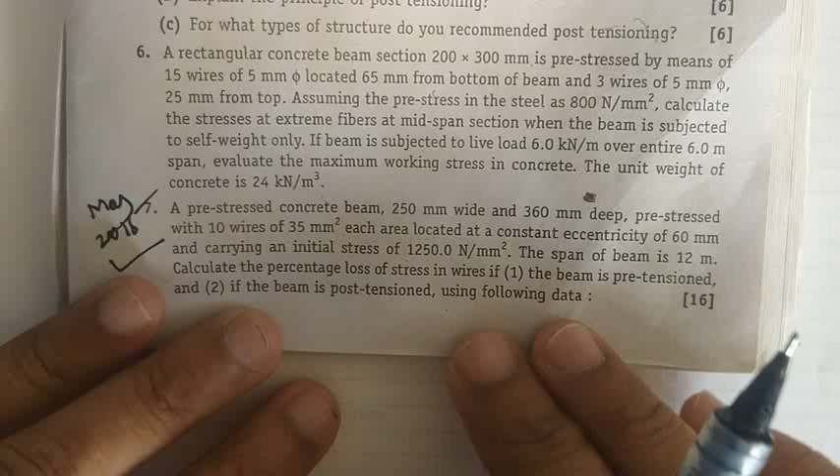Let us solve another question related to the calculation of losses. The question was asked at 2016 for 16 marks. Let us go through this question.

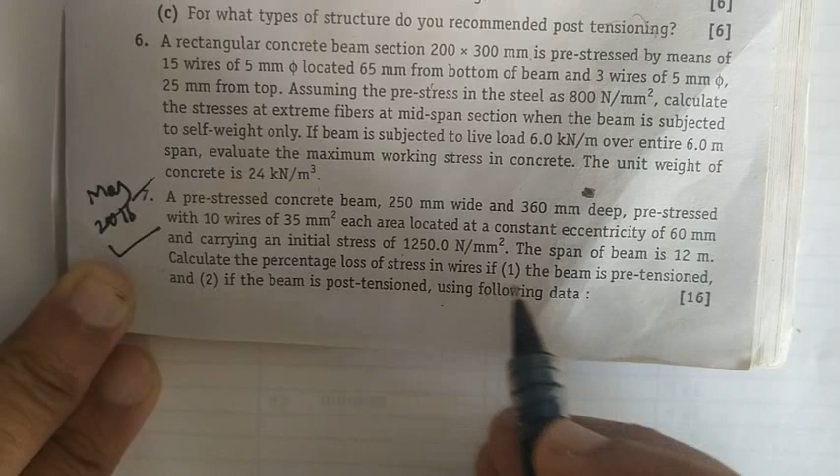A pre-stressed concrete beam 250 mm wide and 360 mm deep, pre-stressed with 10 wires of 35 mm square each, area located at a constant eccentricity of 60 mm and carrying an initial pre-stress of 1250 Newton per mm square. The span of beam is 12 meter. Calculate the percentage loss of stress in wires if the beam is pre-tensioned, and second one if the beam is post-tensioned, using following data.

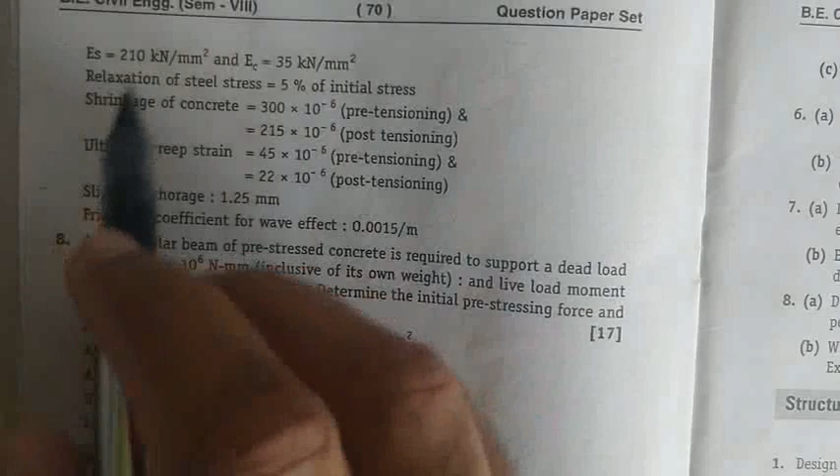The given data is: Young's modulus of steel is equal to 210 kilonewton per mm square. Young's modulus of concrete is equal to 35 kilonewton per mm square. Relaxation of steel is equal to 5% of initial stress. Shrinkage of concrete is equal to 300 into 10 raised to minus 6.

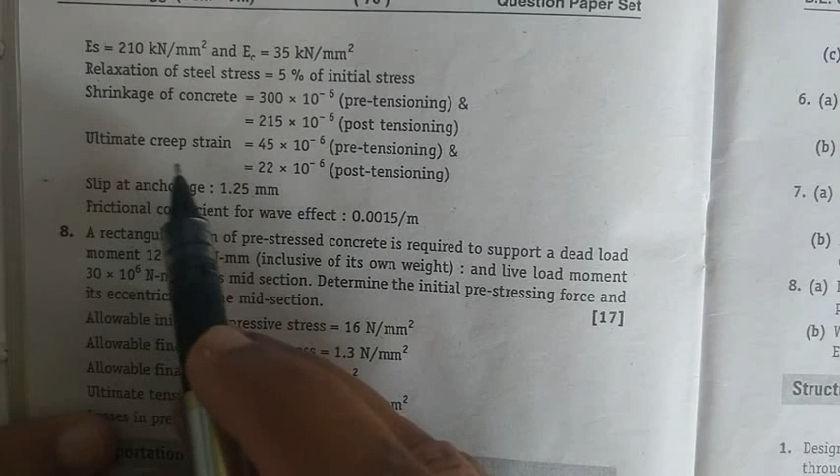This is for pre-tensioning. It is 215 into 10 raised to minus 6 for post-tensioning. Ultimate creep strain is equal to 45 into 10 raised to minus 6 for pre-tensioning, and 22 into 10 raised to minus 6 for post-tensioning. Slip at anchorage is equal to 1.25 mm. Frictional coefficient for wave effect is equal to 0.0015 per meter.

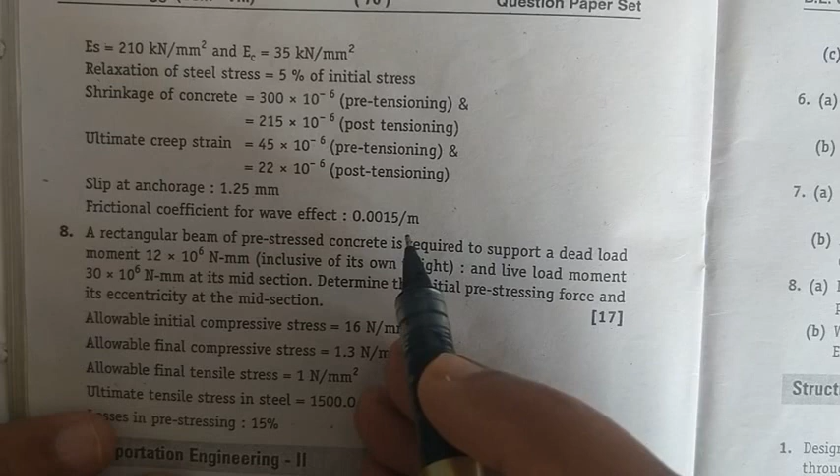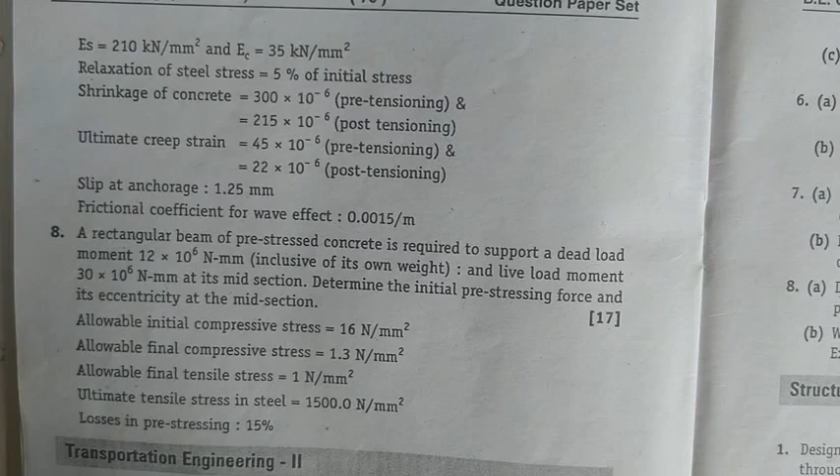You have to find out all these losses and make a list of all these losses related to the post-tensioning and pre-tensioning beams, and find out the percentage loss. Let us solve this question.

First you have to sketch the cross-sectional view of this beam. So this is the cross-section of the beam with 250 mm wide. The depth of beam is 360 mm.

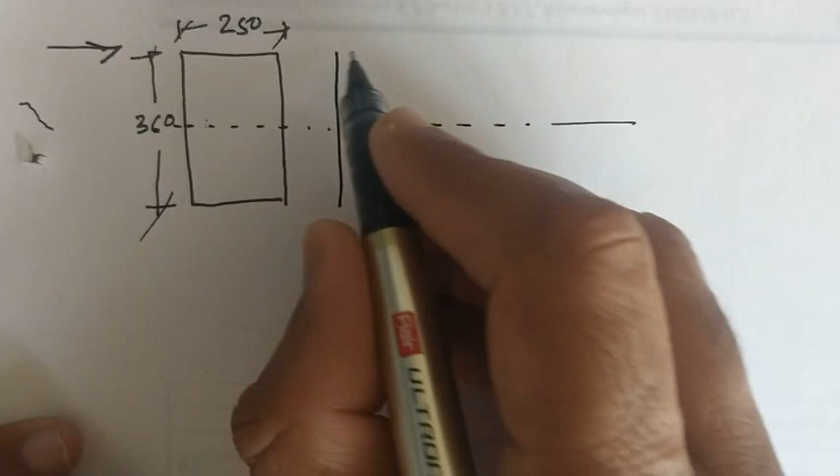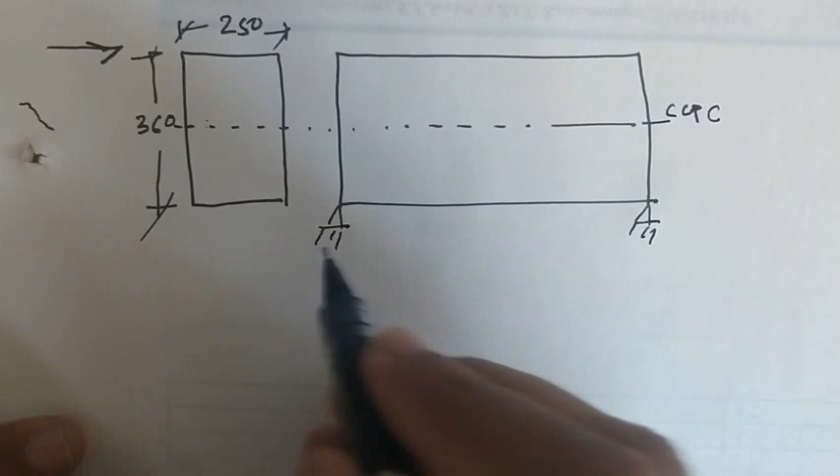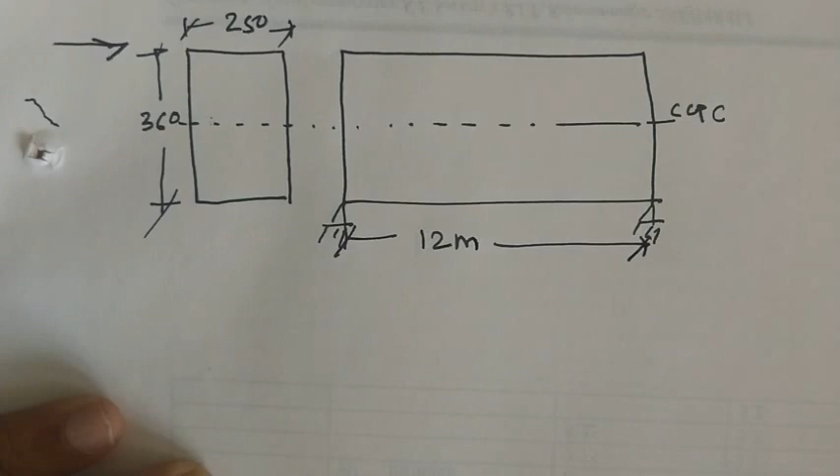This is the CG of concrete. Also you have to sketch the longitudinal section of the beam. Span of beam is 12 meter. The tendon is having constant eccentricity of 60 mm, meaning the tendon is straight, with a constant eccentricity of 60 mm.

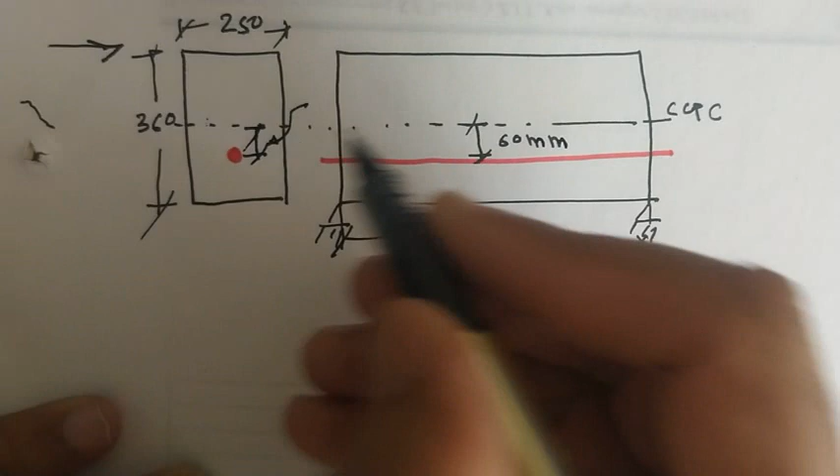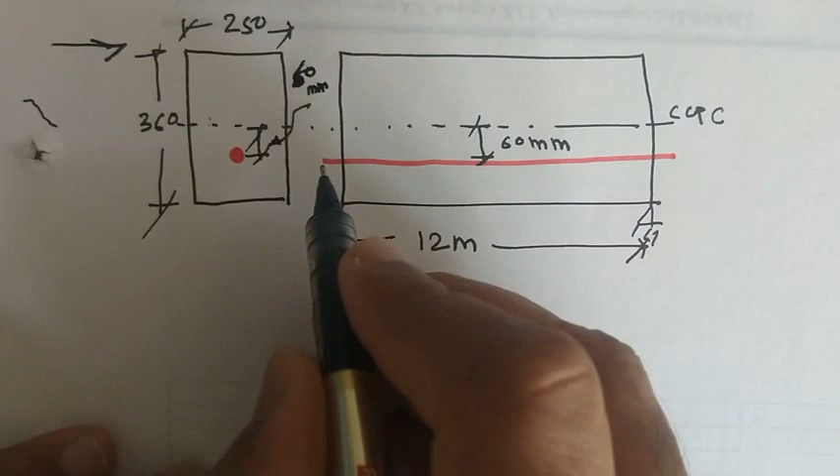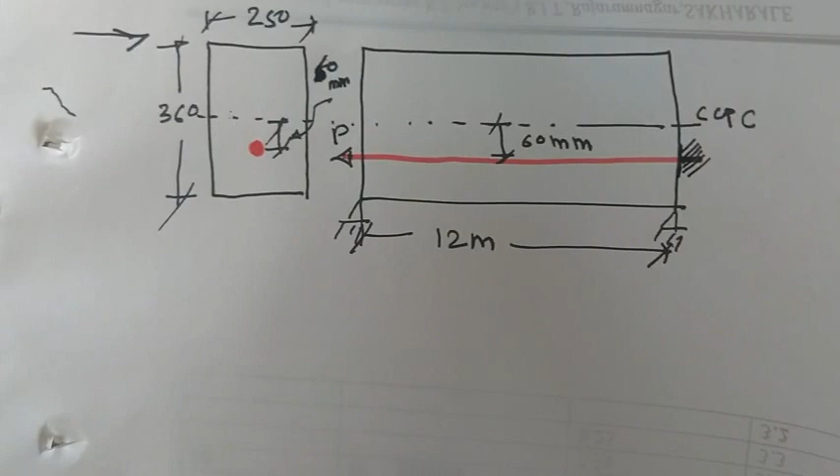You have to also show the wave of the tendon in cross section. The eccentricity is 60 mm. Pre-stressing force is provided here. Let us assume that one end is fixed. So you have to find out all the losses with respect to the given data.

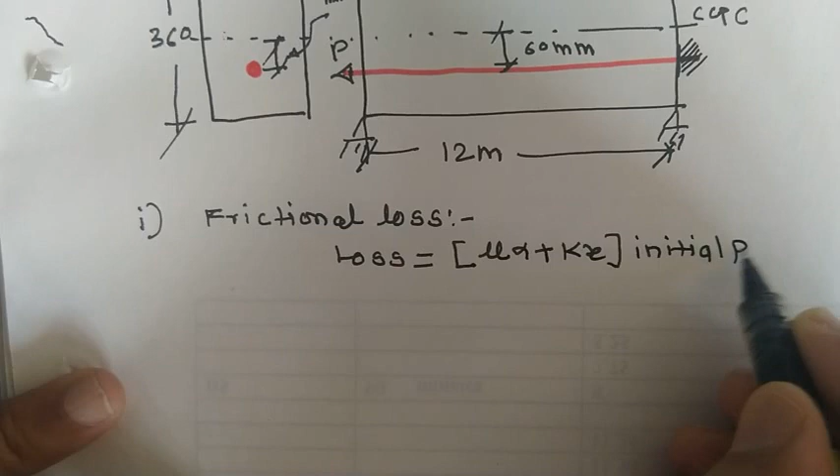So the first loss is the frictional loss. We know that the frictional loss is calculated using the formula mu alpha plus kx, into initial pre-stress. Again, the mu alpha term is 0 because it is a straight tendon. The value of K is given in the question: it is 0.0015 per meter.

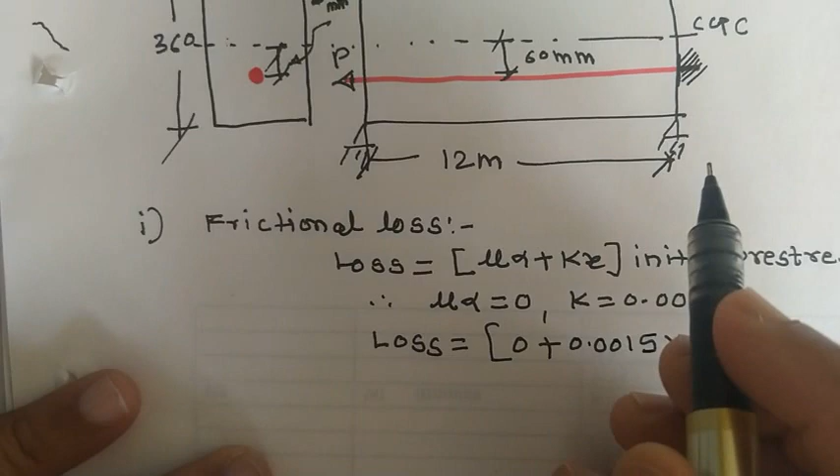So let us calculate the loss. This term is 0 plus 0.0015 multiplied by x. X is the distance from the jacking end where the maximum loss is developed. Consider this the jacking end and this the remote end. Always at the remote end the maximum loss is developed, so x is nothing but the span of the beam. So we directly put here 12 meter.

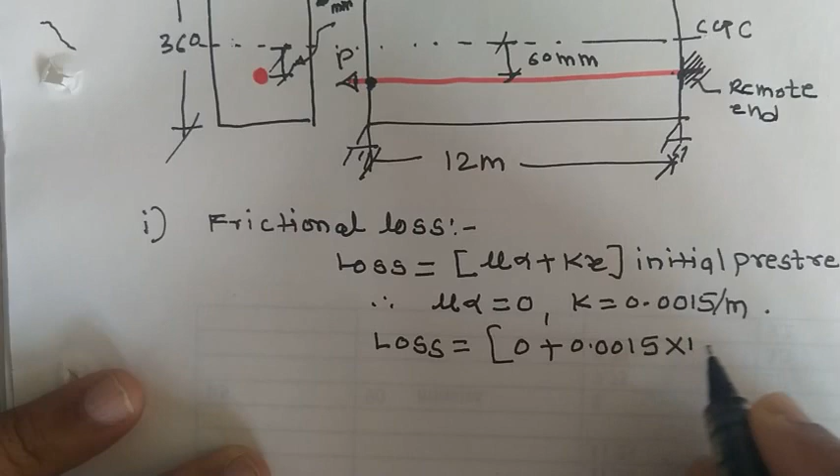And the initial pre-stress is mentioned in the question, it is 1250. So what is the frictional loss? Let us calculate the multiplication: 0.0015 multiplied by 12 multiplied by 1250. So this loss is 22.50 Newton per mm square.

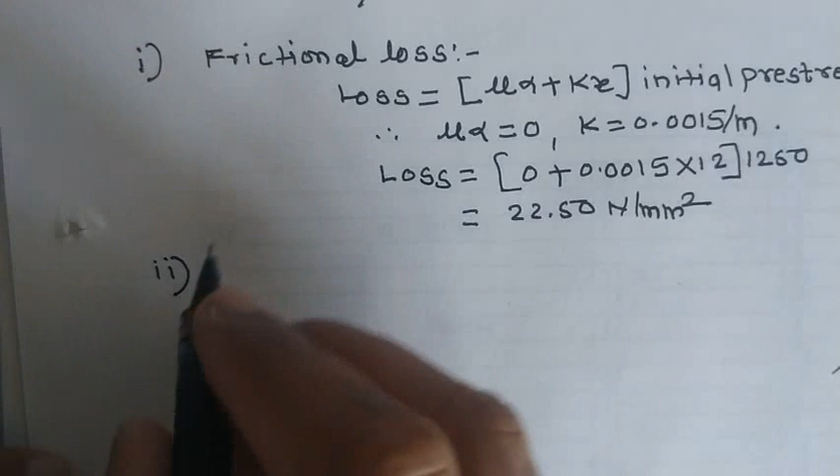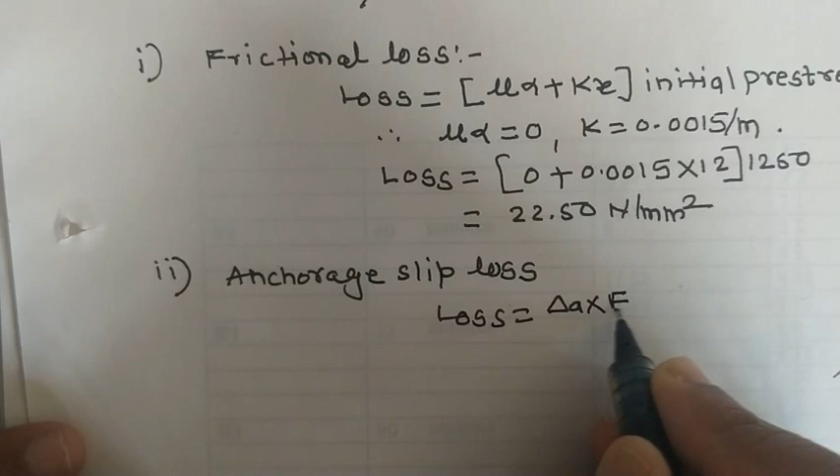Now let us calculate the next loss, the anchorage slip loss. Anchorage slip loss is del A into ES divided by span of the beam.

So the anchorage slip is given as 1.25 mm, multiplied by Young's modulus of steel which is 210 into 10 raised to 3. But in the question, Young's modulus of steel is given as 210 kilonewton per mm square, so you have to convert this value into Newton per mm square, divided by span of the beam which is 12 meter, so you have to put this value in mm also.

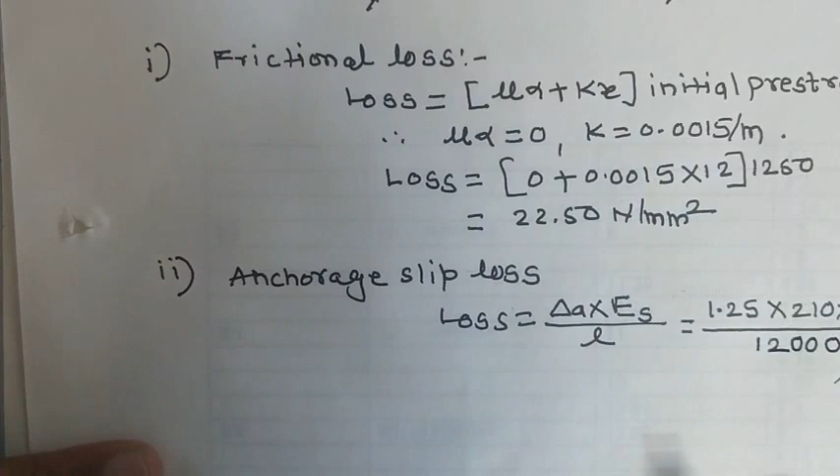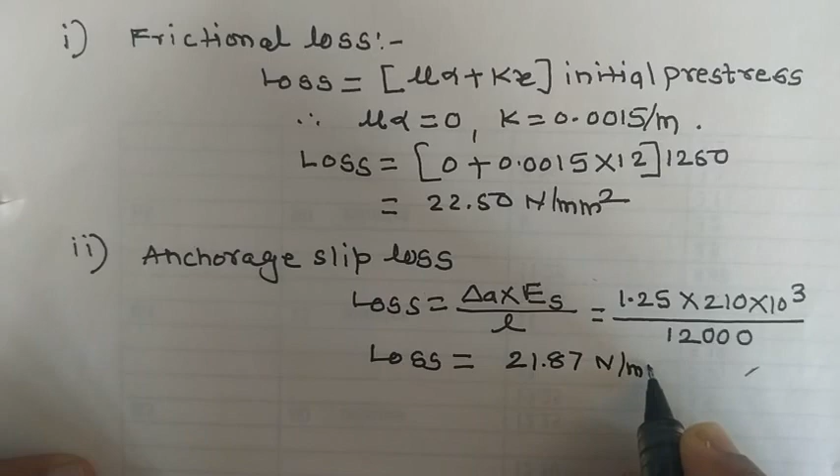So what is the loss of pre-stress due to anchorage slip? 1.25 into 210 times 10 raised to 3, divided by 12,000. Let us check this value: 1.25 into 210 into 10 raised to 3 divided by 12,000. The answer is 21.87 Newton per mm square. So this is the loss due to anchorage slip.

Now you have to find out the third loss.

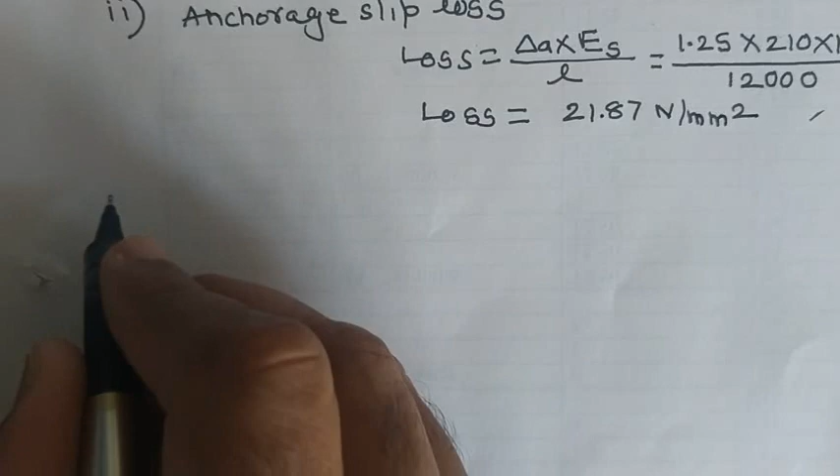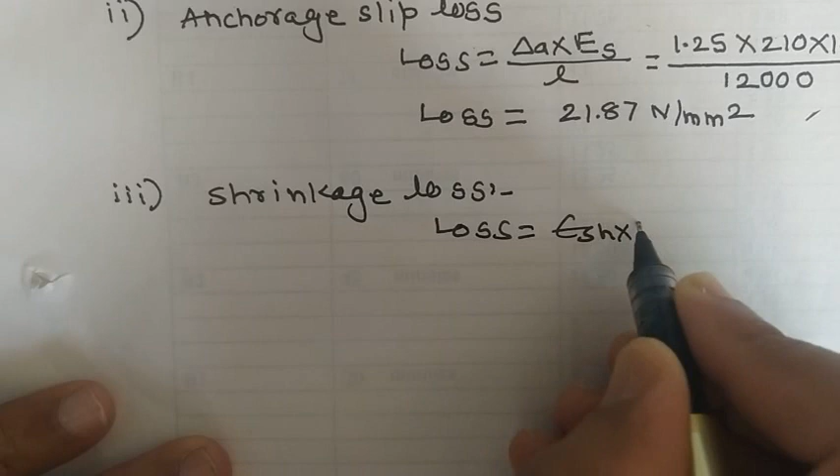Shrinkage loss. This loss is calculated using this formula: shrinkage strain multiplied by Young's modulus of steel.

Shrinkage strain is given in both the conditions of beams. For pre-tensioning the shrinkage strain value is different, for post-tensioning the shrinkage strain value is different. So first find out for pre-tensioning members. So this loss is for pre-tensioning members.

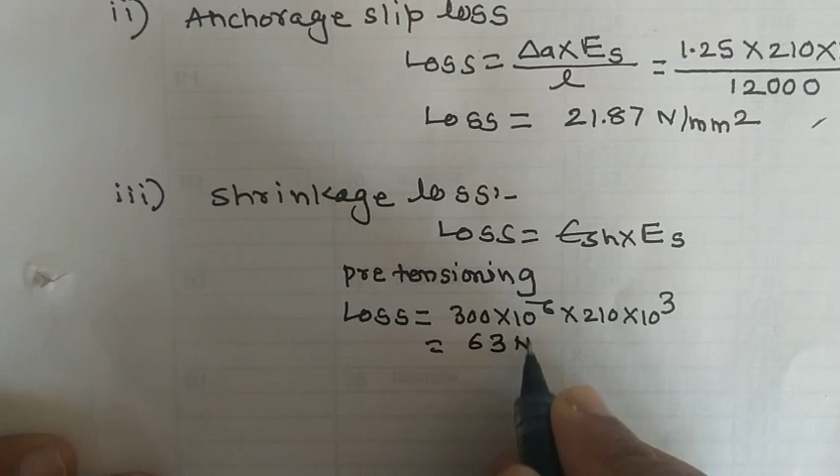Shrinkage strain is given as 300 into 10 raised to minus 6, multiplied by 210 into 10 raised to 3. So the value is 63 Newton per mm square.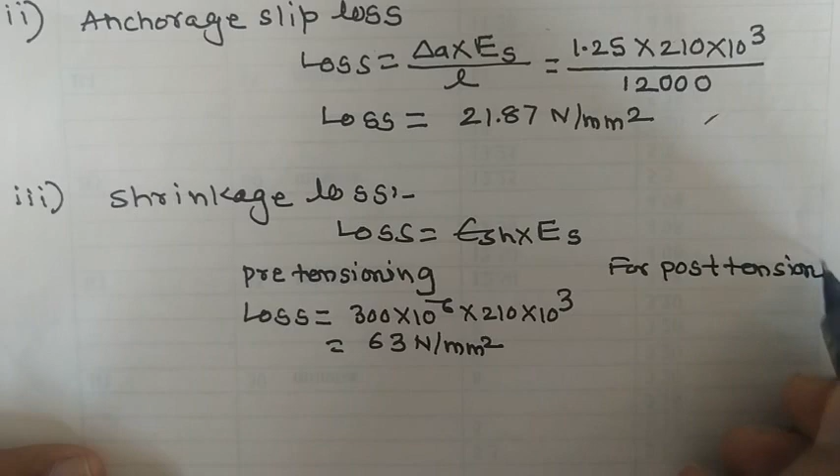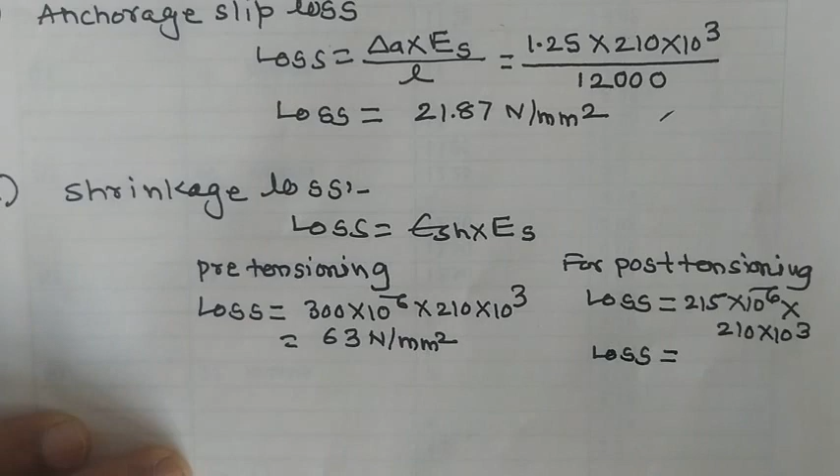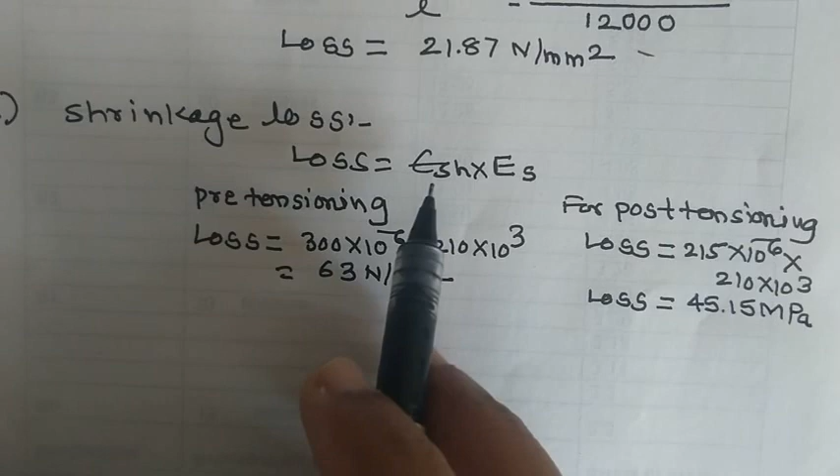And for post tensioning members, this loss is 215 into 10 raised to minus 6 multiplied by 210 into 10 raised to 3. So for post tensioning members, this value is 45.15 megapascal. So in this question, we have calculated the two values of shrinkage loss, because the shrinkage strain is different for post tensioning members and for pre-tensioning members.

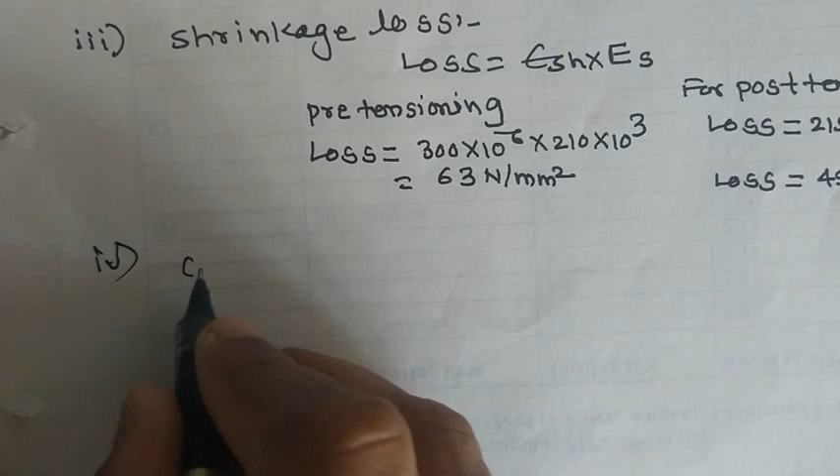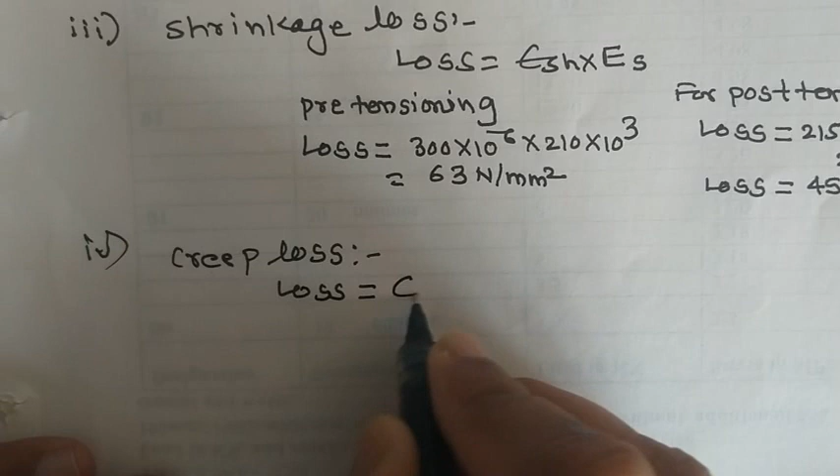Now the next is creep loss. In this question, the creep strain is given, so you have to use the formula having a creep strain value: epsilon creep multiplied by ES multiplied by FC, using this formula to find out the creep loss.

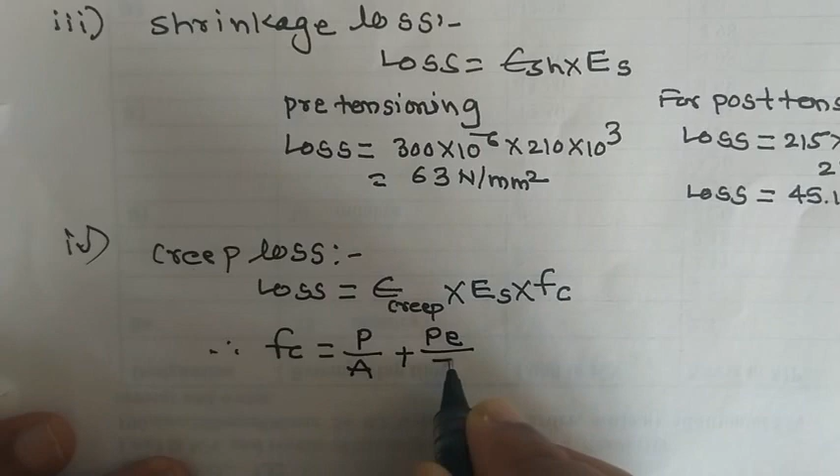Let's first find out the FC. FC is the stress in concrete at the level of tendon. This stress is developed due to the direct pre-stressing force plus the bending moment developed due to the eccentricity of a tendon. In this question, the pre-stressing force is not directly given, so we need to calculate it as pre-stress multiplied by area of wires.

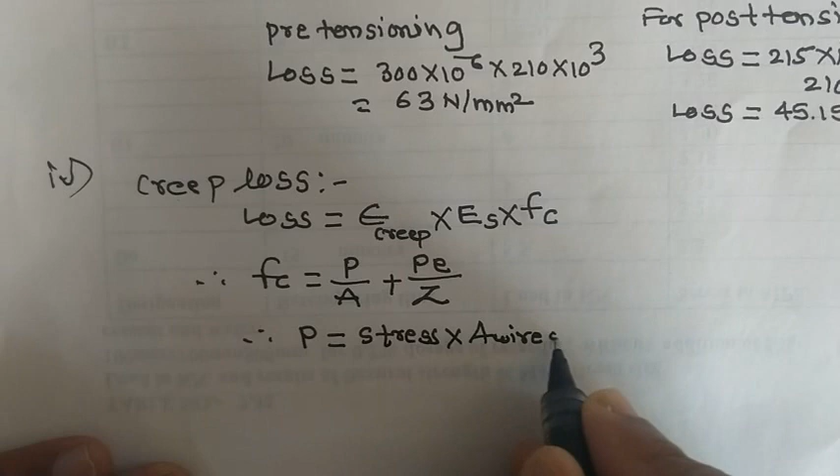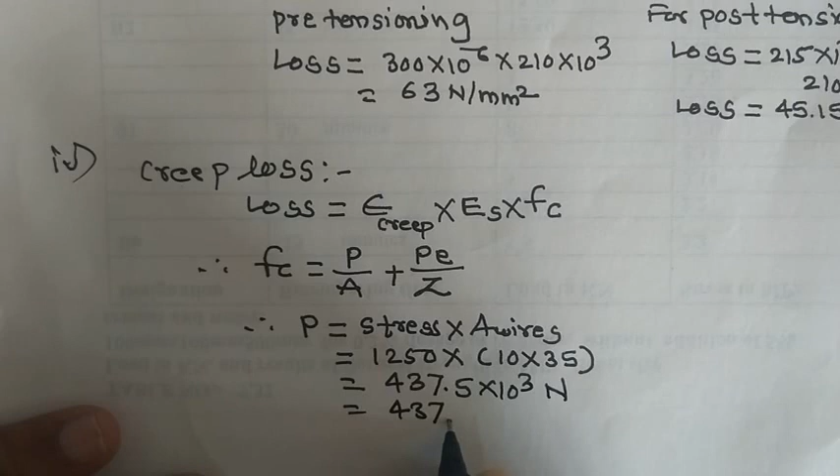The pre-stress is 1250 multiplied by the area of wires. 10 wires are given and each wire has an area of 35 mm square, so number of wires multiplied by area of one wire gives the total area of wire: 1250 multiplied by 10 multiplied by 35. The answer is 437.5 into 10 raised to 3 Newton, that means 437.5 kilonewton. Now let us calculate the FC.

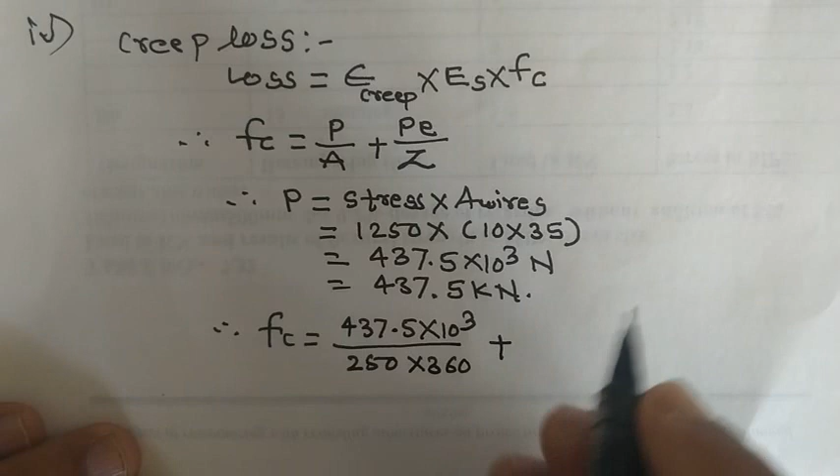There is no need to find out the FC average because the cable is a straight cable. So FC equals pre-stressing force, 437.5 into 10 raised to 3, divided by cross sectional area of the beam, 250 into 360, plus 437.5 into 10 raised to 3 multiplied by the eccentricity of the tendon, 60 mm, divided by Z, which is nothing but I by Y. So it is 1/12 BD cube, 250 into 360 cubed. This is the moment of inertia with respect to the x-axis, and Y is the distance of the wire from the centroid of concrete, which is 60, because you are calculating the FC at the level of the tendon.

The first value is 437.5 into 10 raised to 3 divided by 250 into 360. Let this value be 4.86. Next is 437.5 into 10 raised to 3 into 60 into 60, divided by 1/12 into 250 into 360 cube. This value is 1.62.

Let us check this value: 1 by 12 into 250 into 360 cube, divided by 60. So this value is 16.2 into 10 raised to 6. So 437.5 into 10 raised to 3, multiplied by 60, divided by 16.2 into 10 raised to 6. Correct, this value is correct.

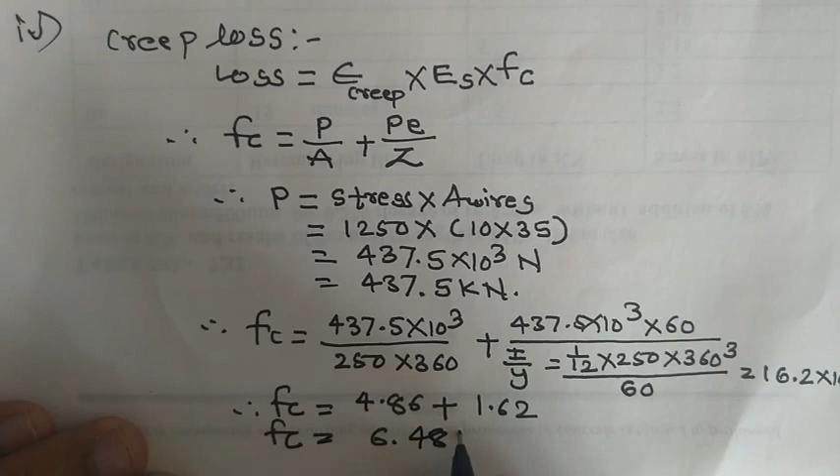So FC is equal to 4.86 plus 1.62, so the FC is 6.48 Newton per mm square. If you get FC, you can easily find out the loss due to creep.

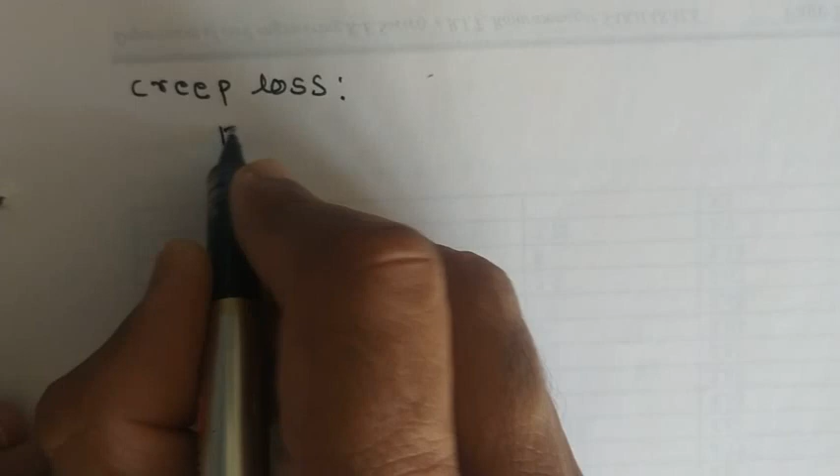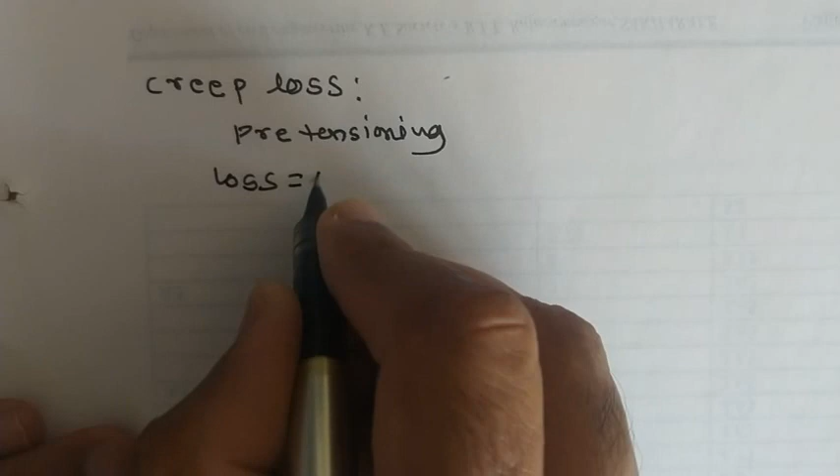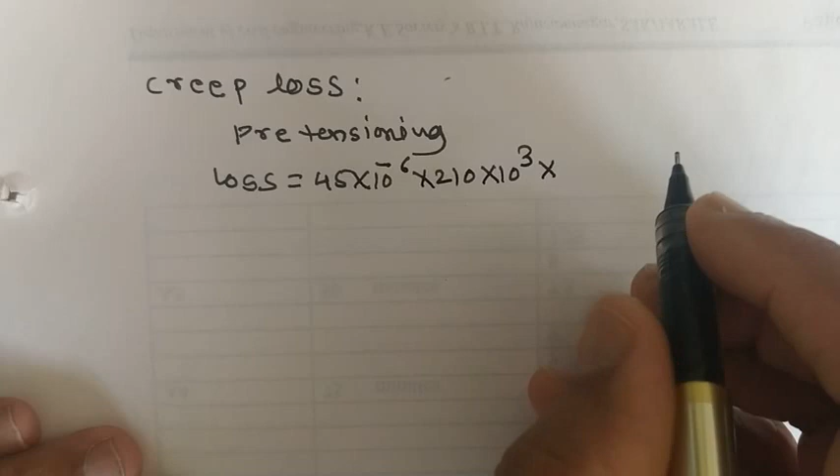So the creep loss, for pre-tensioning first, because the creep strain is different for pre-tensioning and post-tensioning. So the loss for pre-tensioning: the creep strain is 45 into 10 raised to minus 6, ES is 210 into 10 raised to 3, multiplied by FC. The value of FC is 6.48.

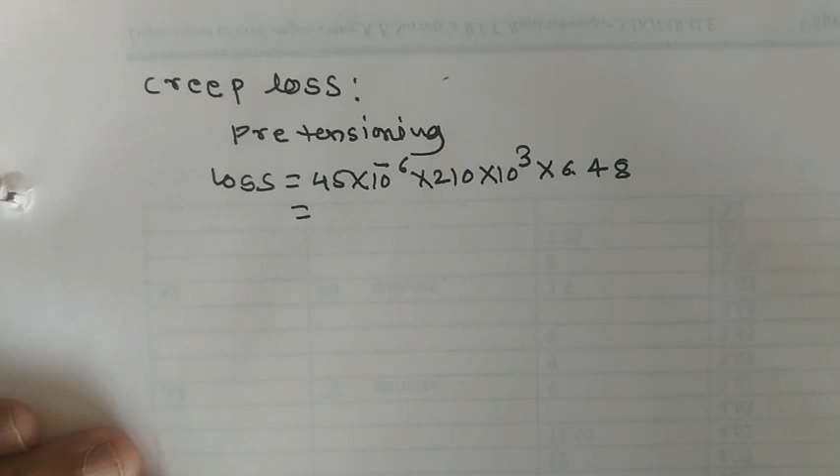Okay, so the value is 45 into 10 raised to minus 6, multiplied by 210 into 10 raised to 3, multiplied by 6.48. So the value is 61.23 Newton per mm square.

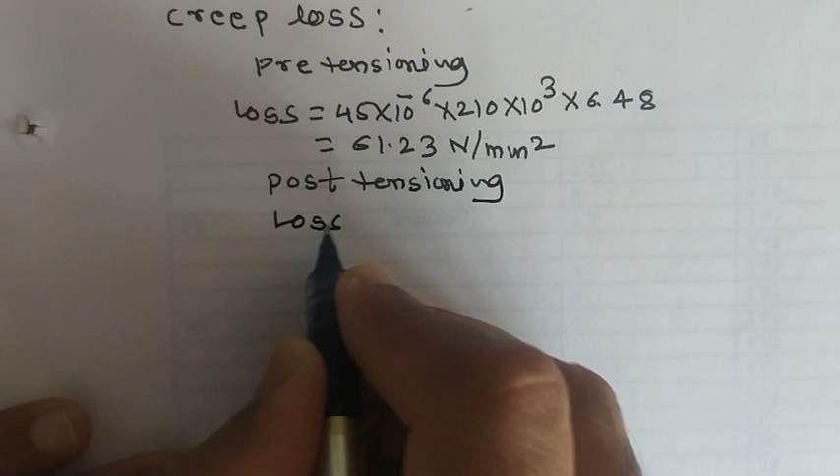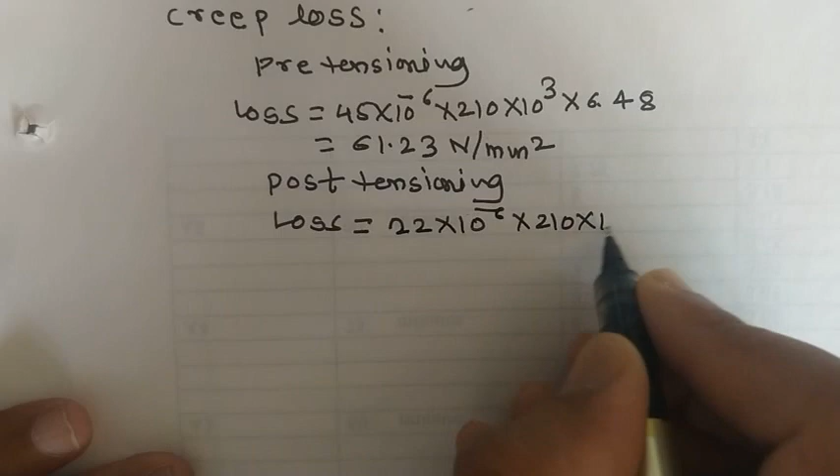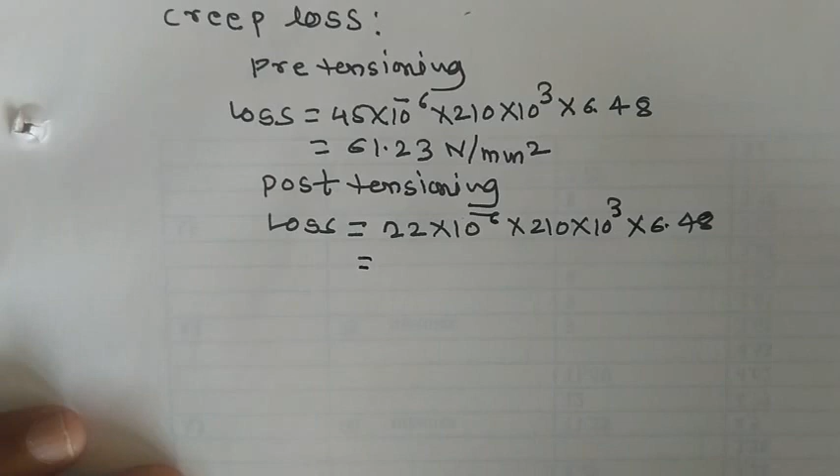So this value is for pre-tensioning. For post-tensioning, because the epsilon creep value is different, it is 22 into 10 raised to minus 6. 210 into 10 raised to 3 is the ES, and 6.48 is FC, because the formula is epsilon creep into ES into FC. So 22 into 10 raised to minus 6, 210 into 10 raised to 3 multiplied by 6.48, the value is 29.93 Newton per mm square.

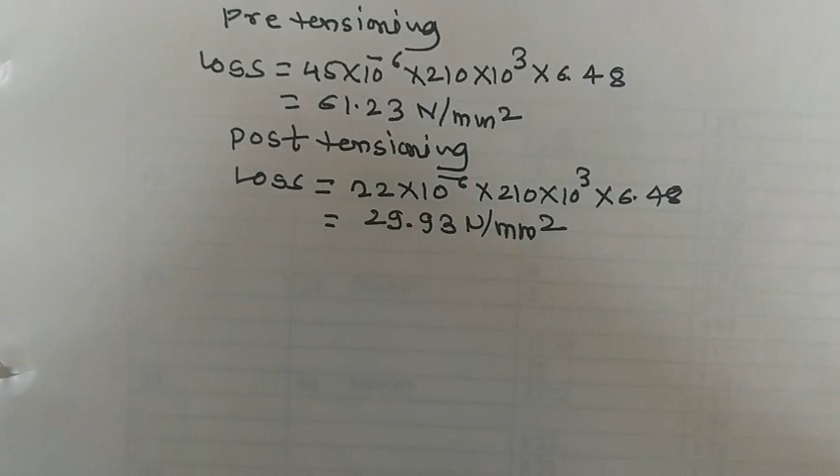So we have calculated the creep loss. The next is friction loss, which is already calculated, anchorage slip is calculated, shrinkage, creep - these losses are calculated. Now lastly, you have to find out the relaxation loss.

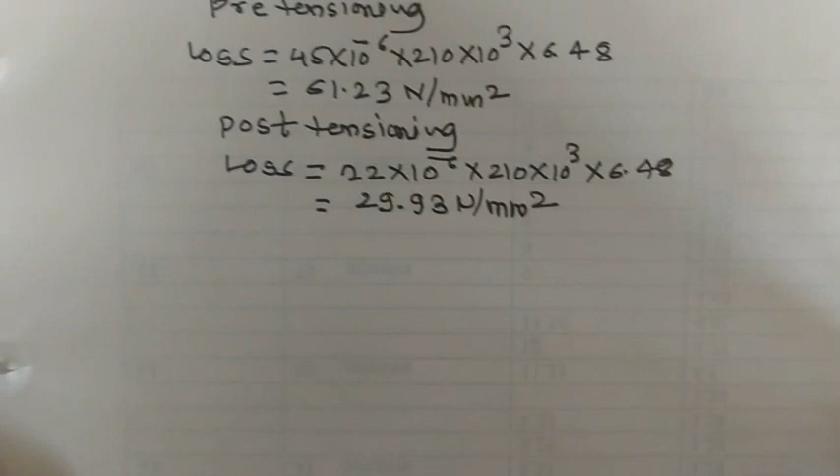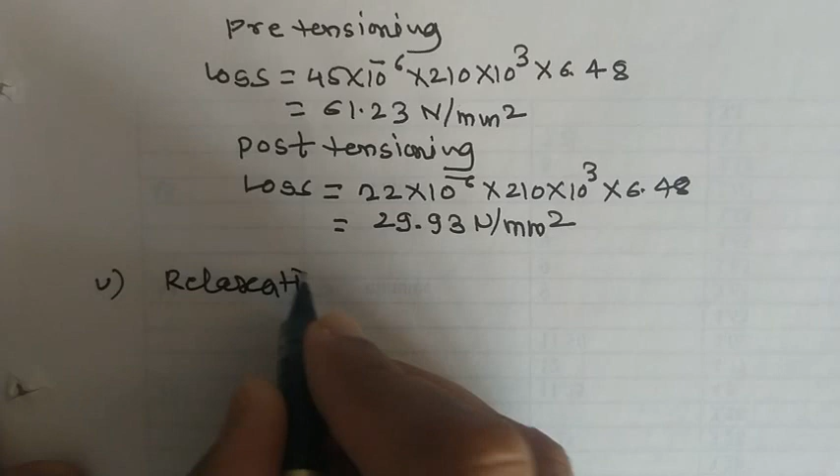Fifth one is relaxation loss. So this loss is 5% of initial pre-stress. So 5 divided by 100 into initial pre-stress is 1250. So this value is 62.5 Newton per mm square.

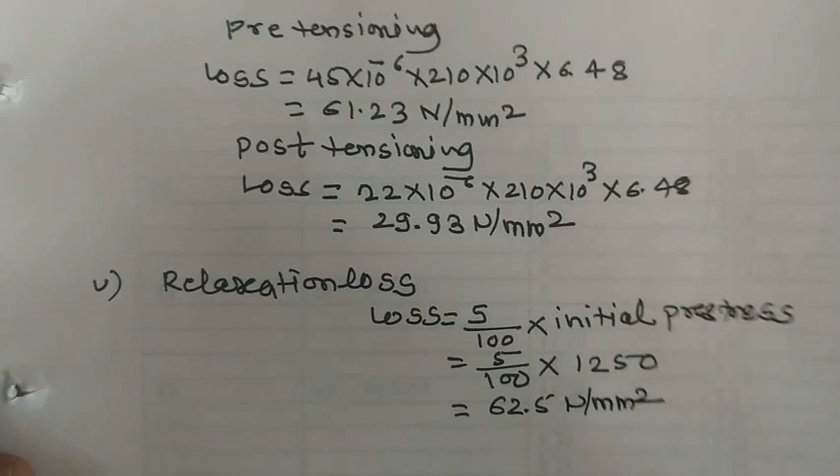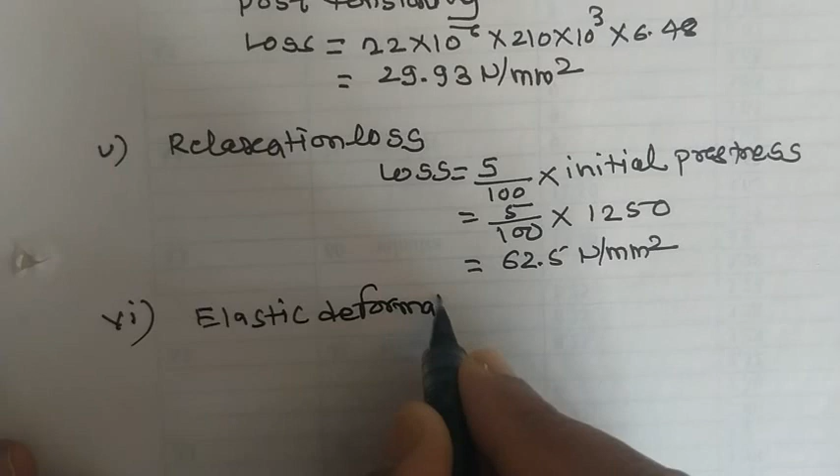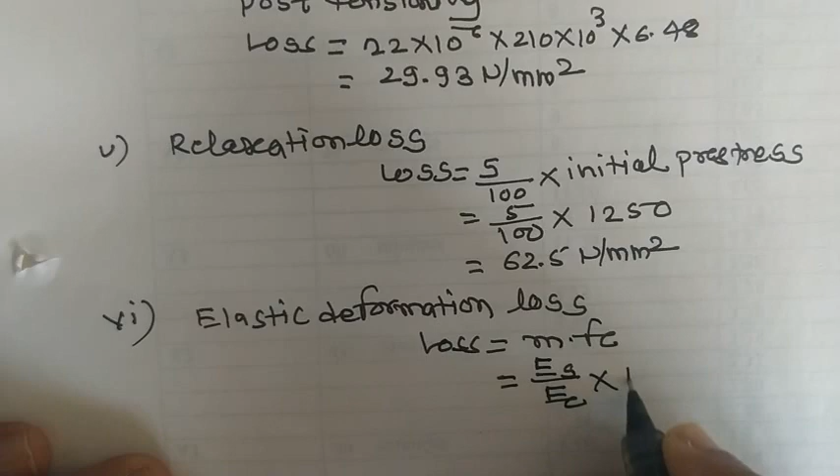And last loss is elastic deformation loss. So the sixth is elastic deformation loss. This loss is calculated as M into FC. M is equal to the ratio of Young's modulus of steel divided by Young's modulus of concrete, into FC which we know. So Young's modulus of steel is 210, Young's modulus of concrete is 35, FC is 6.48. So 210 divided by 35 is 6, multiplied by 6.48, it is 38.88 Newton per mm square.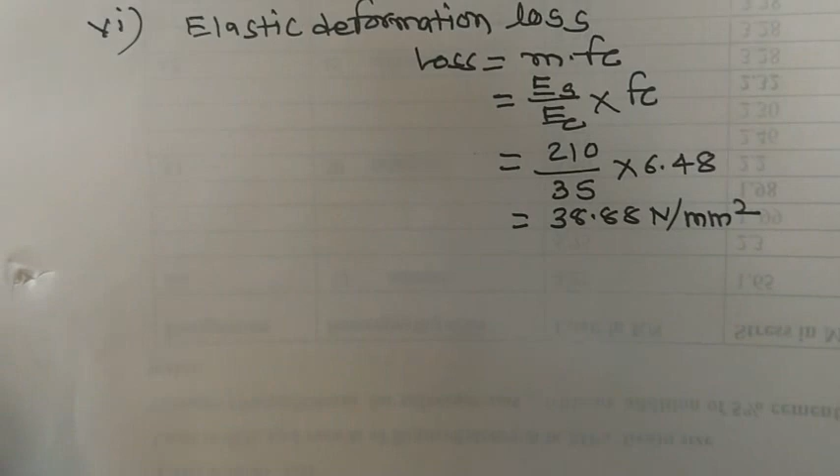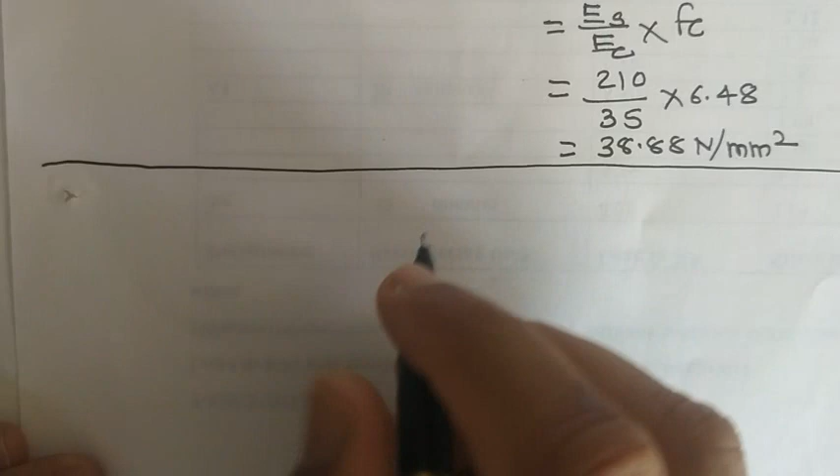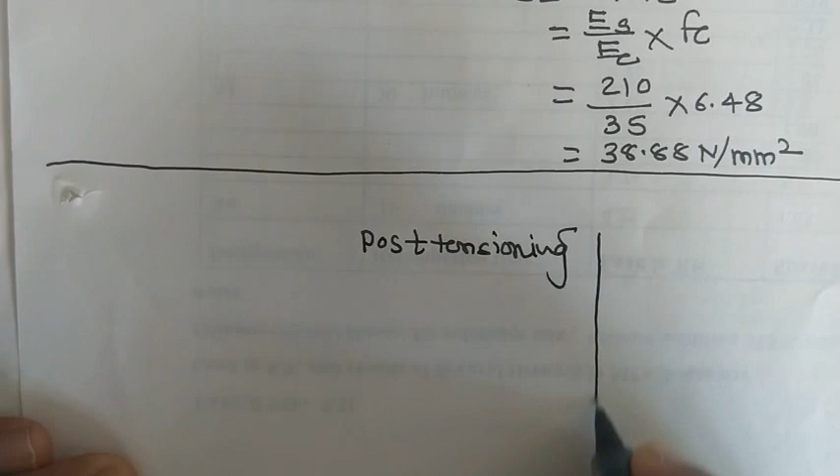So total all losses are calculated. Now list out all losses related to post-tensioning and pre-tensioning, and finally find out the percentage loss. So first you have to list out all these losses - first for post-tensioning beam, and next for pre-tensioning beam.

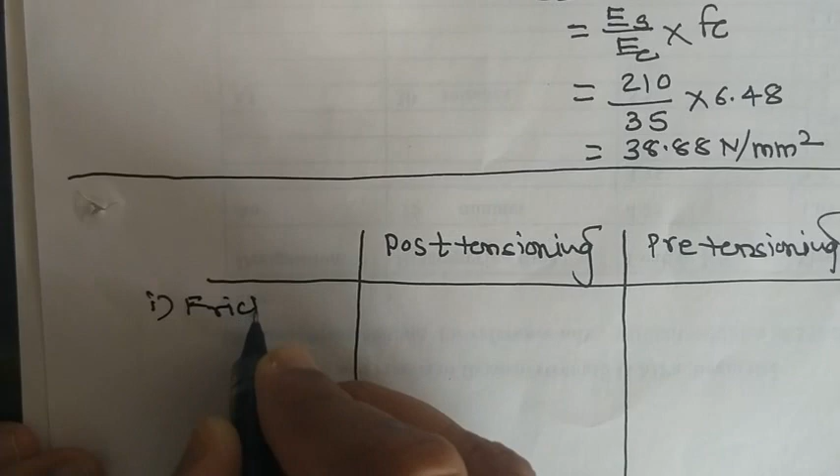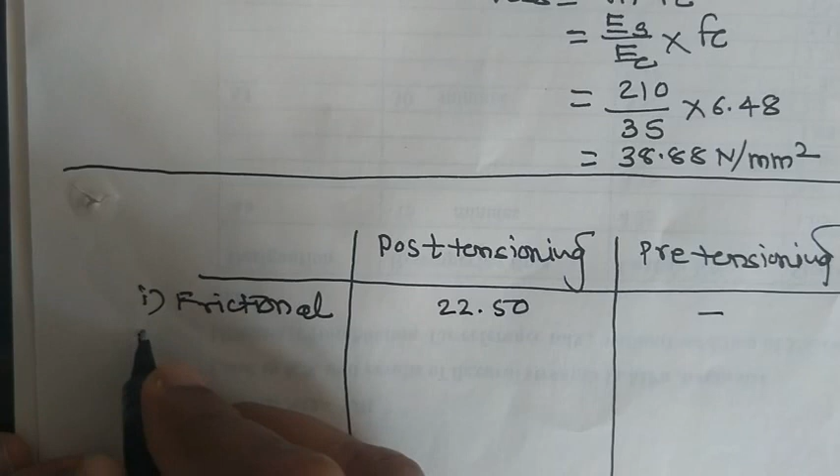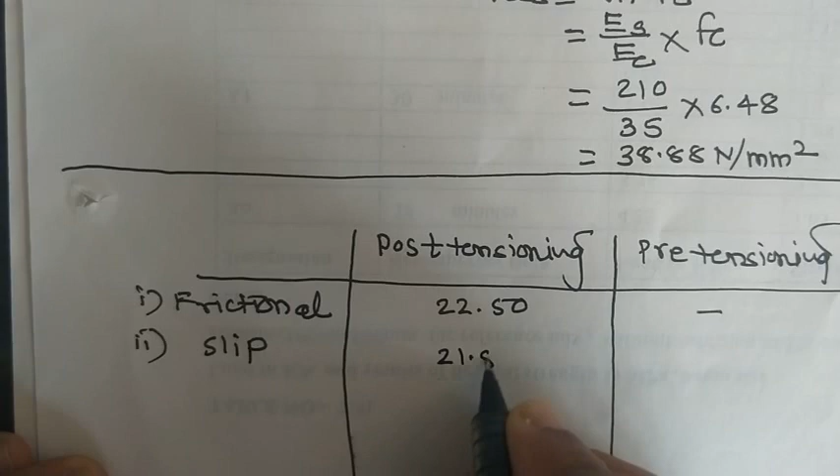I'll write down all the losses. So first loss is frictional loss. We know that frictional loss is present in post-tensioning, the value is 22.50, and it is absent in pre-tensioning. Second is anchorage slip loss, present in post-tensioning, it is 21.87, and absent in pre-tensioning.

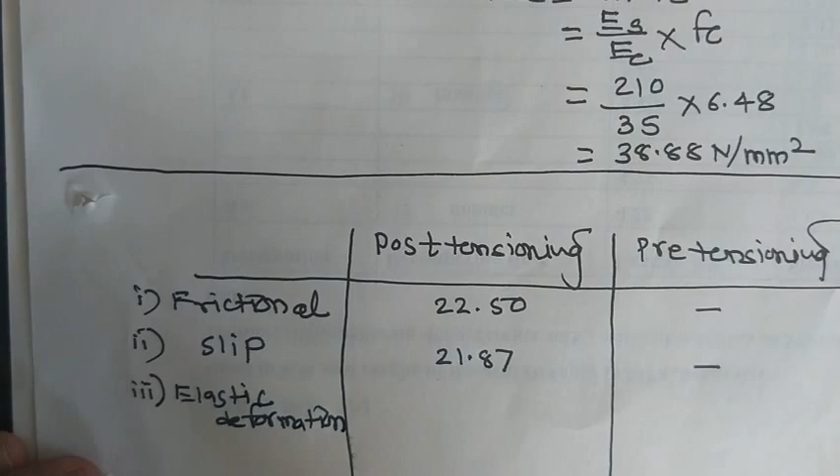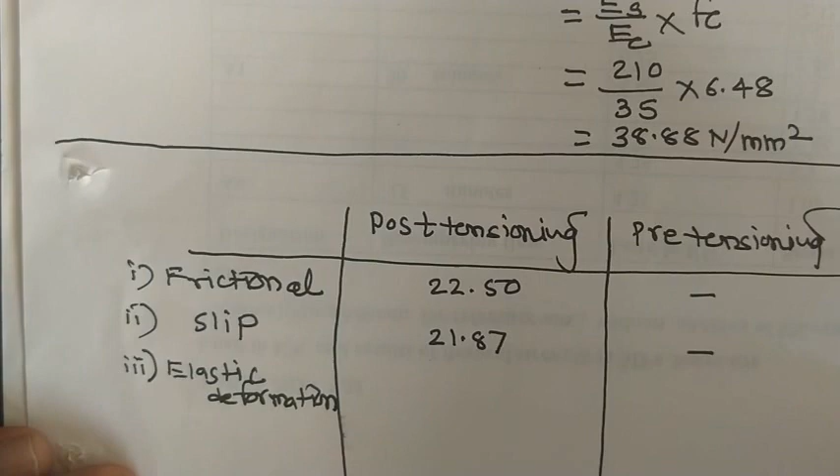Third one, elastic deformation loss. So if the wires are tensioned one after another, this loss is present in post-tensioning. Assume that the wires are tensioned simultaneously, since no special condition is mentioned in the question. So this loss is absent in post-tensioning, but in pre-tensioning this loss is present, its value is 38.88.

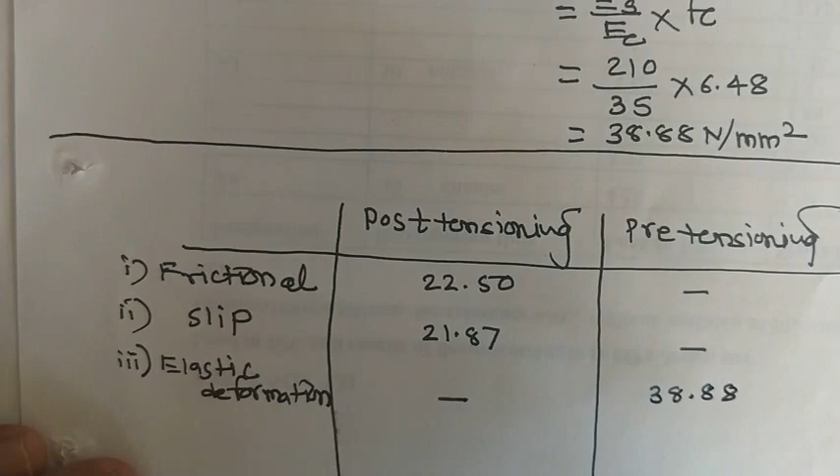Now further losses are present in both cases. So fourth is shrinkage loss. For post-tensioning it is 45.15. For pre-tensioning it is different, it is 63.

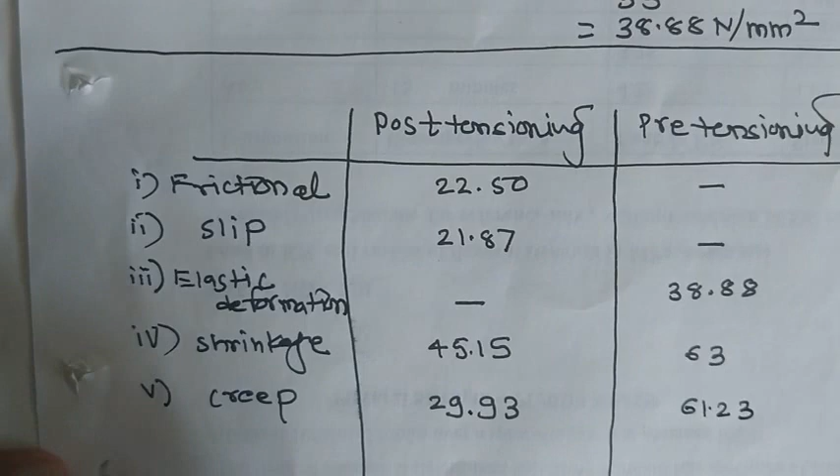Creep loss for pre-tensioning and post-tensioning have different values. For post-tensioning it is 29.93. For pre-tensioning it is 61.23.

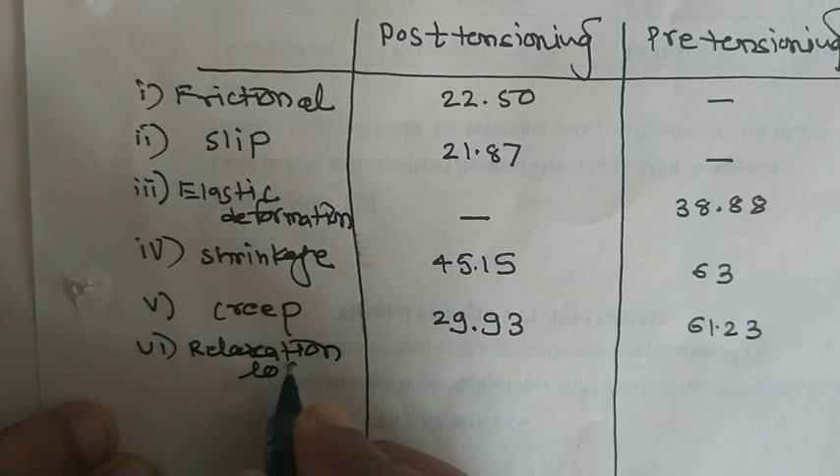And last, sixth one is the relaxation loss. It is nothing but creep in steel. So relaxation loss is 62.5 in both cases. So we have listed out all these losses related to the post-tensioning and pre-tensioning conditions.

So let us add all these losses, so you get the total losses. Add these losses: 22.50 plus 21.87 plus 45.15 plus 29.93 plus 62.50, total is 181.95. So this is the total loss in post-tensioning members.

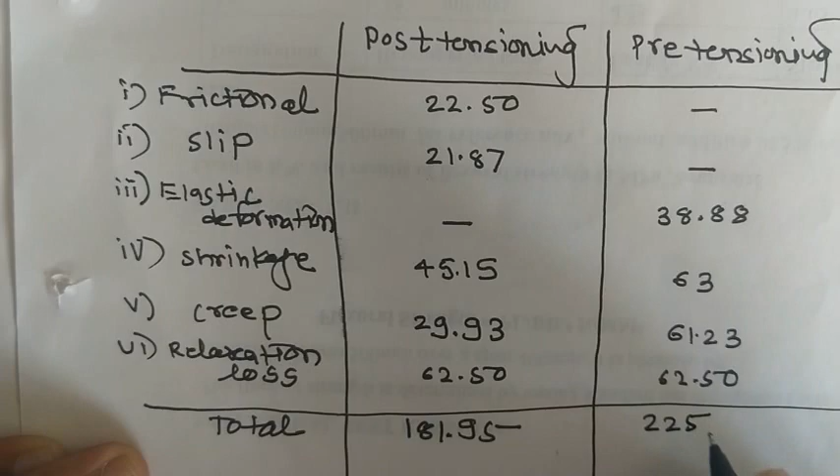In pre-tensioning: 38.88 plus 63 plus 61.23 plus 62.50, so this is 225.61. So what is the percentage loss? How is it calculated? The percentage loss is calculated as total loss, 181.95, divided by initial pre-stress, which is 1250, multiplied by 100. So 181.95 divided by 1250 multiplied by 100, the answer is 14.55% percentage loss in post-tensioning.

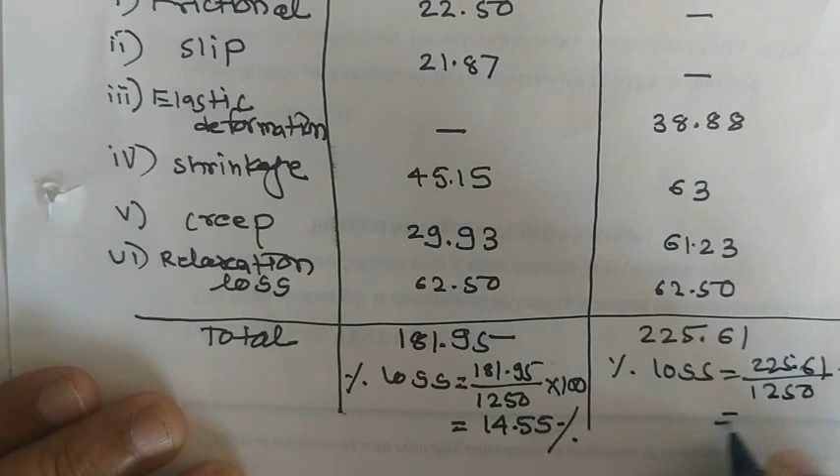Same thing you have to do in this case. So percentage loss: total loss is 225.61 divided by initial pre-stress which is 1250, multiplied by 100. So 225.61 divided by 1250 multiplied by 100, the total percentage loss is 18.04%. So total percentage loss in post-tensioning is 14.55, and for pre-tensioning it is 18.04. So this is the completion of this problem.